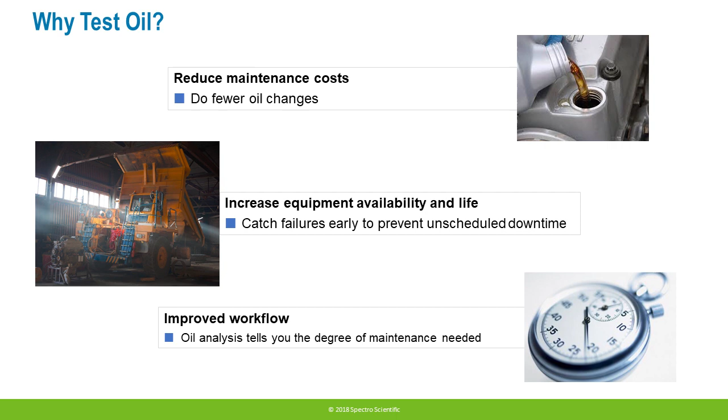So there's a number of fleets that will use off-site laboratories to get this information. There are limitations associated with using off-site labs. The biggest one is the turnaround time. It can take days or weeks to receive the information back, especially for remote locations such as mines.

So the maintenance engineer doesn't have the information needed at the time of the repairs. You're also looking more backwards at oil analysis as a failure analysis as to what happened, instead of using it as predictive maintenance before issues occur.

There's also times when outside laboratories aren't the ones closest to the asset, so there's a limit of understanding of what that asset condition is. If the information is available right at the shop floor, they are able to look closer at that asset at that time. It also limits resampling possibilities.

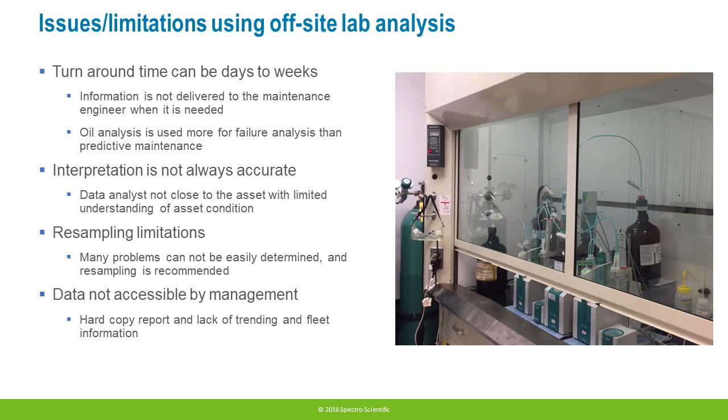If there's issues that need to be looked at closer, being able to send another sample out to an outside lab is an issue. And then, with data not being accessible by management, the hard copy report sent back from the lab doesn't allow a lot of trending and fleet information.

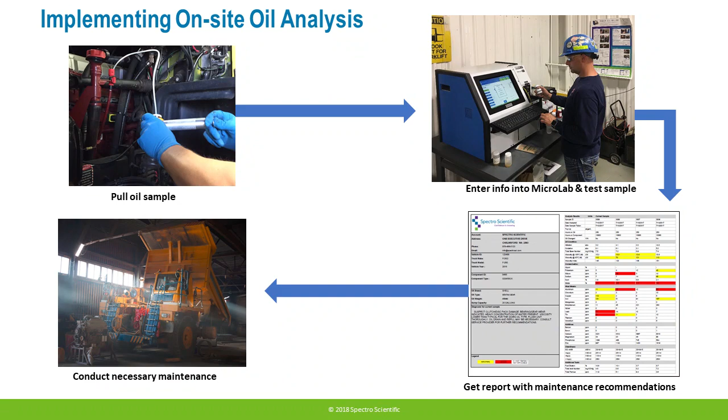So implementing an on-site analysis program is actually quite simple. All you need to do is pull an oil sample, then the operator enters the information into the MicroLab about what oil is being tested. Within 10 minutes, they can get a detailed maintenance recommendation from the MicroLab report and conduct the necessary maintenance actions.

So when you're looking at oil analysis and what you can identify for your equipment, there's 4 top maintenance issues that we find in most fleets: oil properties, where you're looking at whether the oil is overextended or underutilized and can continue to be used. Also, wear metals is a big issue that we see.

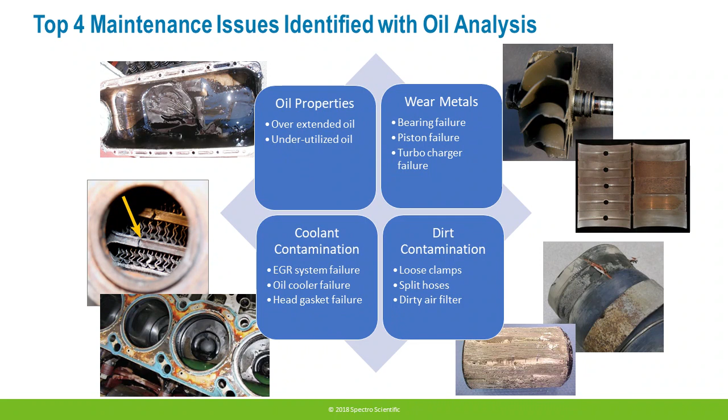The oil analysis can show breakdown from a variety of mechanical areas within the machine. Contamination is also another key factor that we see in oil analysis, either coolant contamination from a variety of sources or dirt contamination.

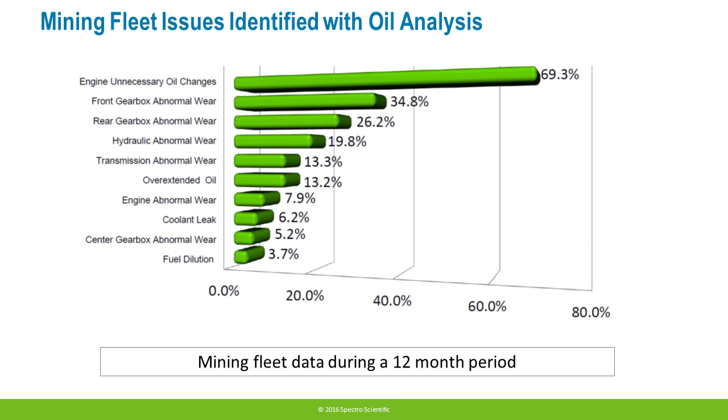Looking at one particular fleet in this mining fleet over the course of a 12-month period, these are just some of the top issues that they identified with oil analysis. You can see a number of wear issues and coolant leaks, but the largest one is unnecessary oil changes. Almost 70% of their samples showed that the oil was actually still good at that time and could continue to be used.

This presents a really large savings opportunity for fleets to be able to extend that oil drain and save the cost of disposal of old oil and the labor charges as well. Looking a little bit at the MicroLab that allows you to do this on-site analysis, it's a cost-effective instrument compared to doing a full on-site oil laboratory. It's very simple, doesn't require a special facility or a laboratory.

It's usually placed somewhere near the workshop floor, and it's all automated, conducting 4 different tests of the oil automatically, then cleans and gets ready for the next sample. So there's no special operators needed, and there's no sample prep needed. It just takes a 5-ounce, 150 ml bottle to connect up to the machine, and then it runs through all of the necessary tests.

The built-in expert system allows the interpretation of all of the data as well. And then there's also, we have online data and asset reporting systems.

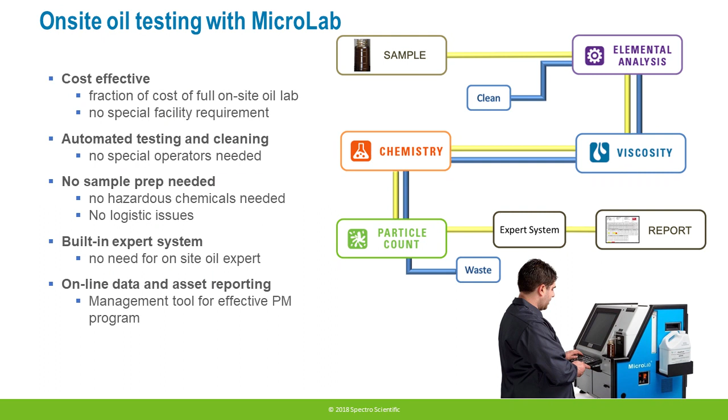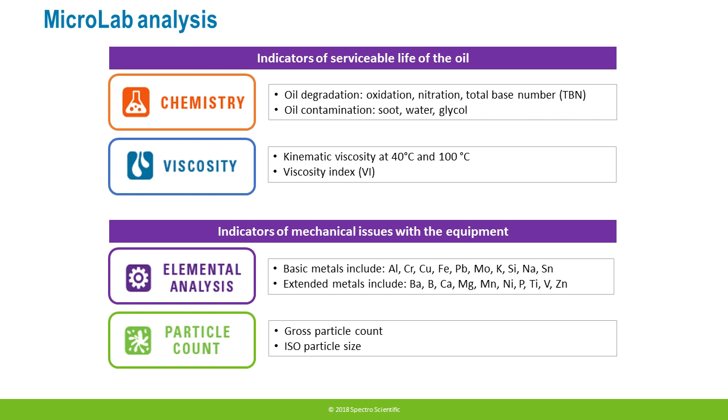The MicroLab analysis gives a complete workup of the oil. You can receive information about the serviceable life of the oil through chemistry parameters such as oxidation, nitration, and total base number. It also gives you oil contamination information and viscosity, and then information about the mechanical issues of the equipment with a full elemental analysis up to 20 elements, showing you any breakdown of the machines and additive conditions of the oil. Particle count gives you information about any particle contamination within the oil.

The MicroLab report is a very simple report to read. It gives you all of the analytical data on the right-hand side, showing up to 4 past samples—the current sample and 3 historic samples—so it allows trending analysis of the machine. Color-coded alarms alert the operator as to any conditions that need to be examined.

And then on the left-hand side, you see the diagnostic statements. This is interpreting all of the data results into mechanic statements that allow the operator to see the diagnosis and maintenance actions that are needed.

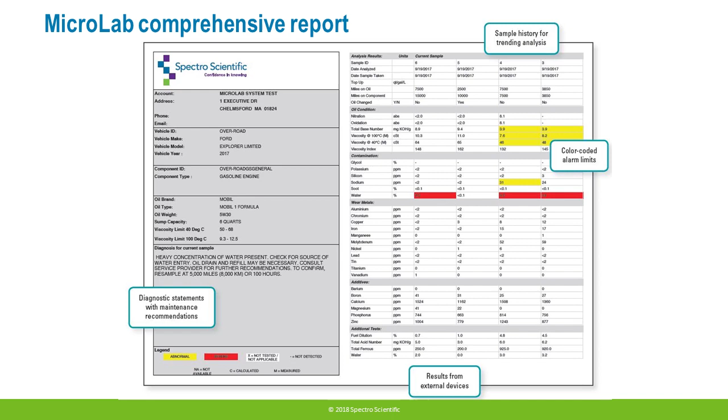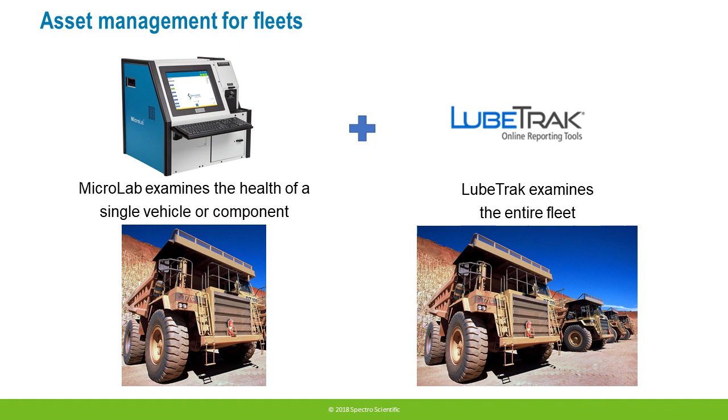In addition to the MicroLab instrument, we have LubeTrak, which is a software data management system. This allows fleets to look across all of the equipment. So the MicroLab gives a report that's telling the maintenance engineer what to do on that particular vehicle or component, and LubeTrak will allow that reliability manager to look across all of the equipment and determine what needs to happen for their maintenance program.

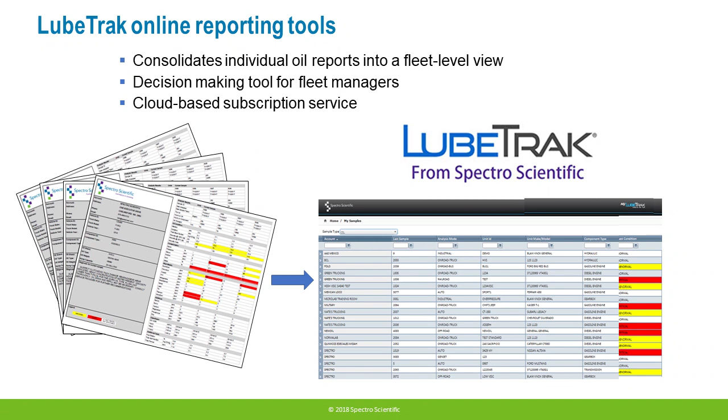Essentially, LubeTrak is consolidating all of the individual reports into a data view, so it allows some fleet decision making. We also have dashboards with various views of graphs and charts of that information. It allows fleets to also have mobile access to any remote locations, so they can view what's going on from headquarters.

LubeTrak is also a customized system. You can set up email alerts and custom reports, which allows you to look closer at your overall maintenance program.

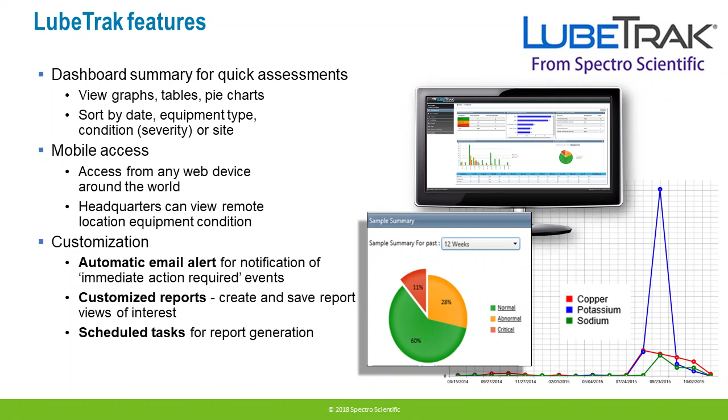Thank you, Janet. I'm going to share some of the information in the case study with you from a client of ours in our region. It's a contract miner based in West Africa, and we did the case study on and off between 2012 and 2015. The project was done as part of a continuous improvement initiative to relieve some of the financial and operational pressures on the business. It was a very old contract, and it was dragging from year to year, so there was a bit of work to be done to make sure that the business makes money.

During the case study, I'll take you through some of the detail, but in summary, we achieved in terms of oil savings, doing oil draining extensions, we saved $166,000. We saved $696,000 by reducing our unexpected failures.

And we saved about $86,000 by improving the hours that we get from the components. We also made a huge improvement to our parts exchange program in terms of value, and I would like to take you through some of the detail in the following slides.

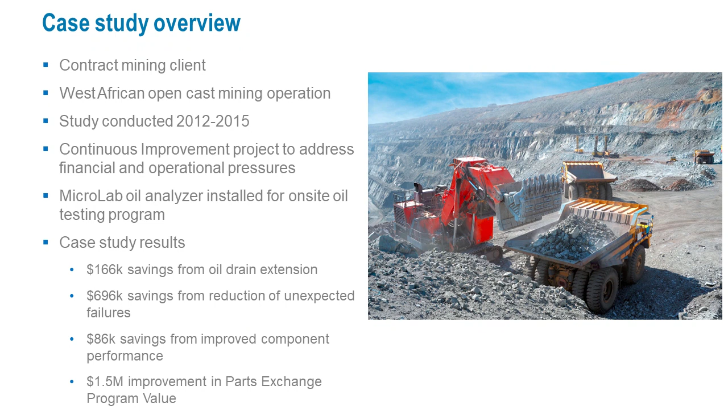So key issues of asset management, I'm guessing this is the same for all the businesses, is basically income and expenses. In this sort of scenario of a contract miner, your key drivers would be your availability of equipment so that the production section can use and utilize the equipment, and other key performance indicators like your mean time between failures and stoppages are your key drivers in this sort of business.

And the same as with any other business, you would always want to reduce your running costs as far as possible. In this specific case, we focused on lubrication costs and component maintenance, which I will explain in the following slides.

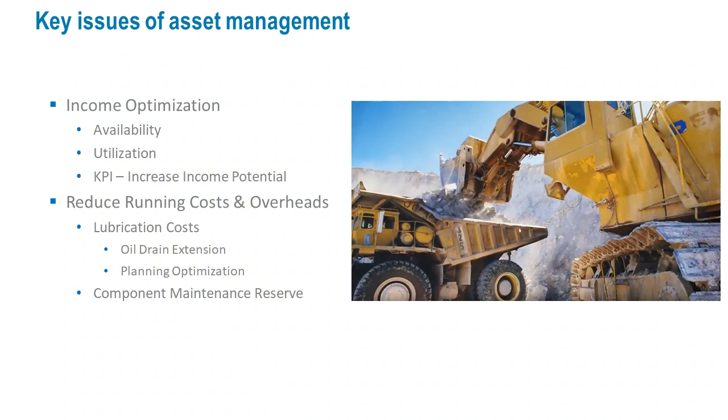So in this particular project, we had targets, obviously, in terms of availability, utilization, and so on, so that we can move a certain amount of product in a day. In this case, effectively, we should utilize a machine 16 hours a day to achieve all of those relevant production targets.

This business was based on a break-even plant model, where your costs basically determine your income, and the costs we derive from historical values and OEM recommendations.

In this case, the plant was running on a dry plant rate, which means that the client supplied all the fuels, and the operators and all of the production staff were paid by the production section in the business. So it was a break-even model for plant or the engineering side.

So all the profit in the business was made on the production side. In terms of maintenance and life cycle, the rates makeup, we focused on spares and lubricants and rotable reserve provisions, which is your maintenance reserve for spares and large components like engines and transmissions, and also for tires and all the other relevant rotables.

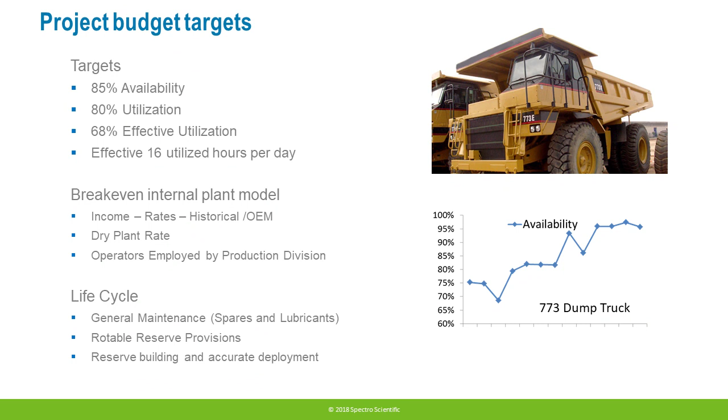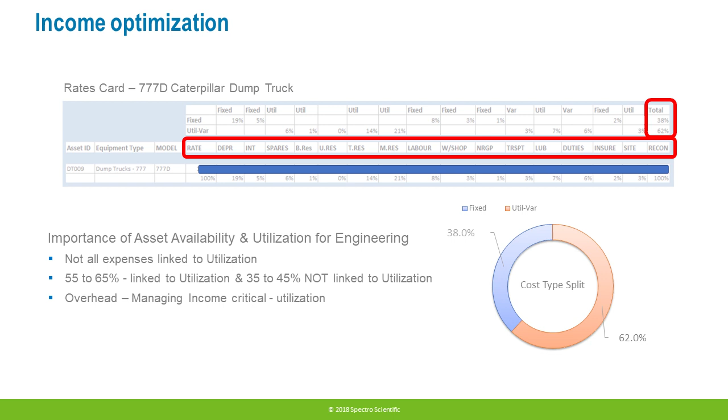And between 35 and 45% of this rate would not be linked to utilization. So it would normally be fixed expenses that you would have. And that's why it's so critical to manage your income and your utilization so that you can cover the fixed portion as well.

On the next slide, I've got an example of availability of machines and how we would monitor that to ensure that you've got availability of equipment so that production can utilize the equipment to generate income.

So highlighted in red in the middle there, I've got the daily and month-to-date availability of loader number 3. So on the month-to-date availability, you can see that the equipment's available for 52% of the month, which is not very good because the target in this case is 90% because it's a prime mover.

So on the right-hand side, we've got a table that indicates the potential gains and losses due to either good availability or poor availability. In this case, loader number 3 has very poor availability, and we're losing $28,000 month to date on that piece of equipment.

I also highlighted the 773 truck fleet on this example. If we have a look on the graph side, also highlighted in red, the month to date availability is 88%, which is above the target of 85%. I will show you now on the next slide what the influence is of this loader on the trucks, because they work as a team, as a production group.

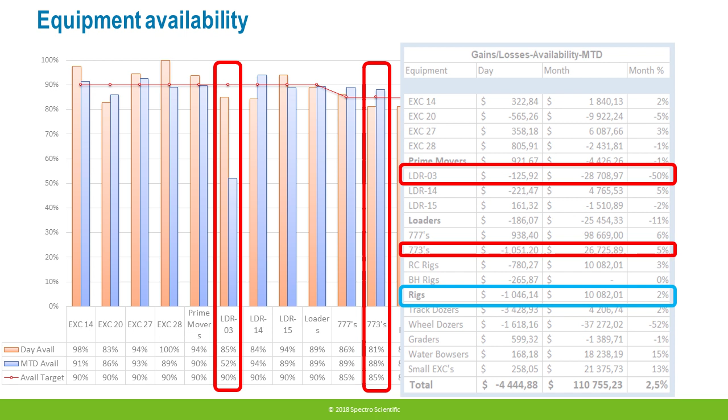Another thing that I've highlighted here, which I'll follow onto the next slide, is the drill rigs, where you can see obviously we're meeting all availability targets in this case, which looks good. But I'll show you now on the next slide on the utilization why we're actually not doing so well, or as well as expected.

As mentioned, this is the equipment utilization graph. Now we've got the utilization month to date versus the availability month to date, with the target.

As mentioned on the previous slide, loader number 3 was not available for production, and we can see the knock-on effect on the 773s I mentioned. The month to date availability is 88%, which is very good, we're hitting targets, but the effective utilization is only 42%.

If you look on the right-hand side, we're actually losing $186,000 month to date on that 773 truck fleet, which is huge. And that's purely our own fault, because the loader is not available to load the trucks.

I'd like to show you the rigs as well. On the previous availability graph, the rigs were above target in terms of availability, but in terms of utilization we're losing $237,000 a month. In this specific case, it was due to the client not having a place for us to drill, so the drills were standing.

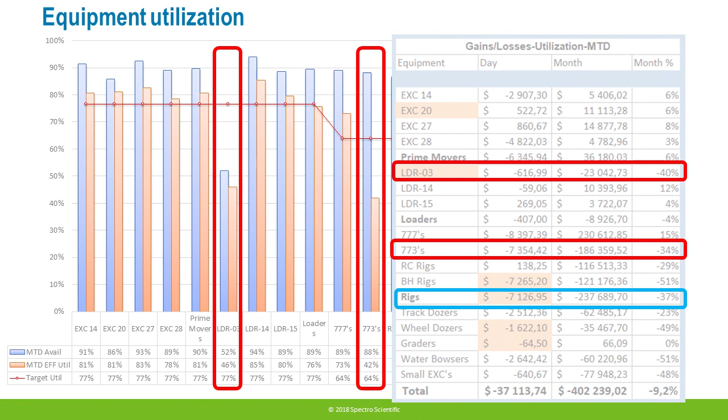This is obviously quite critical. If you think back to the rates I showed previously, where you have a huge fixed portion that you need to cover, and the drills are not working, that's a serious problem.

On this slide, I'd like to show you what the on-site lab mentored us on and helped us with when we installed it. We did a bit of homework, and it took some time to find our feet, but on our prime movers, excavators, and main fleets, we saw a major improvement in mean time between failure.

This KPI is really more about rhythm than anything else, and it really helped the rhythm of production, which helped a lot. This, in turn, translated to better availability as well. I'll show you in one of the slides to come how we got these results.

So with better availability, from what we can see here, it's let's call it a 5 to 10% step up since we installed the lab at that time. But that 5 to 10% is worth millions of dollars, hundreds of thousands of dollars in production time.

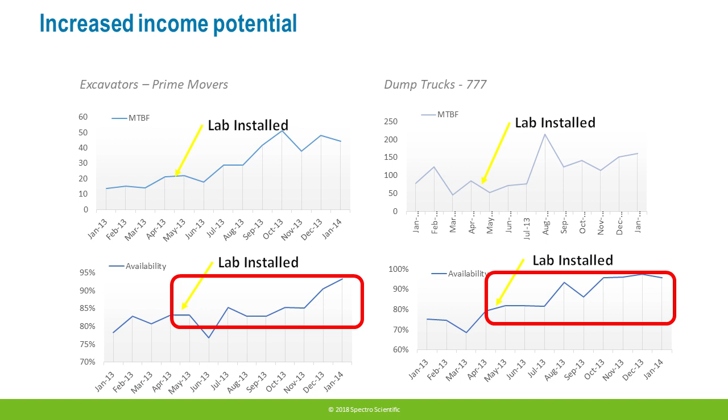On the next slide, we've got the piece of the rates card of a piece of equipment that maintenance actually has control over. We basically have control over the spares expenditure, the bins, the tires, the maintenance reserve, the labor, the workshop overheads, or some of it, and the lubrication costs.

In this case study, I'm going to go into the maintenance reserve portion, which is the big engines, transmissions, final drives, and so on, which is included in the life cycle costing. Then I also want to focus on the lubrication costs and how we got that down.

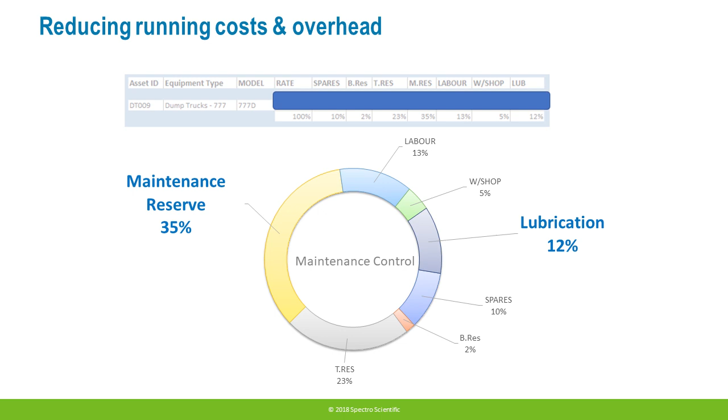In terms of lubrication costs, as we can see on the graph, lubrication makes up about 12% of the portion of the rates card that we as a maintenance department have control over. We did an oil drain extension program to save on lubrication costs, but also to optimize the way we plan and work on the equipment.

On this particular site, we focused on hydraulic, transmission, and gear oils as a start. We calculated the theoretical oil consumption baseline, then the actual baseline based on a 6-month history, and based on the oil analysis data we had, we did some analysis and stats to understand a safe drain interval for some components, and which ones we could extend until the oil analysis told us to change the oils.

Part of the strategy was also to sharpen up the way we manage and control the issuing of oil on a daily basis. We implemented a pre-PM sampling practice, where we would stop and sample the machine before the PM service instead of during the PM service.

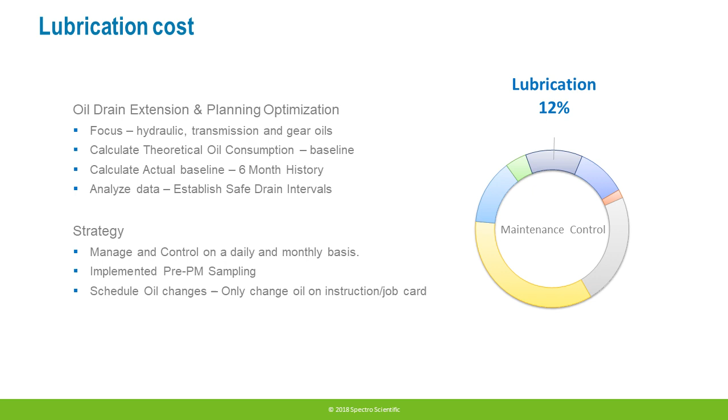We also set up in our maintenance system, which we use to plan services, all of the oil compartments as components, so that we can track the exact time on oil changes or between oil changes.

So to calculate the theoretical oil consumption, there's obviously different methods of doing that, which you can find all over the internet, but we took a more practical approach. We looked at all of the different sump capacities and intervals that they needed to be changed, and added them together over a 2,000-hour period, which is a normal service cycle on these big machines.

In this case, we looked at the 777D dump trucks, and we added a 15% factor for the top-ups, leaks, and others. And we got to a theoretical oil consumption, which we can see on the screen. For hydraulic oil, we got 0.7 liters an hour, and for the transmission and gear oils, we got 0.93 liters per hour that we were supposed to use theoretically.

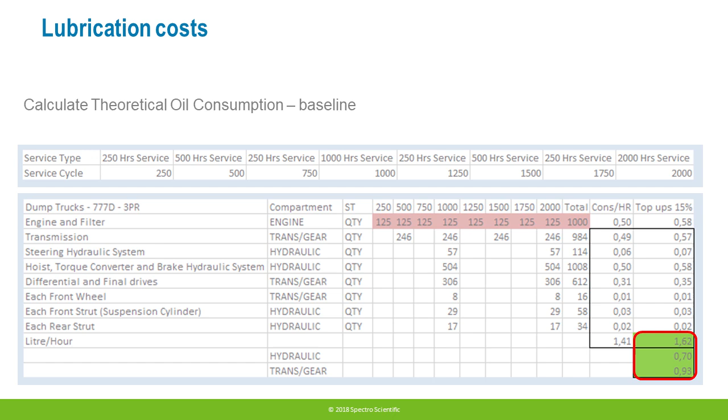Then we went through the history of the oil that we have issued over the 6 months leading up to the start of the project, so we could see that reality paints a bit of a different picture. We were actually overusing on hydraulic oils, and we were looking quite good on the transmission and gear oils. And there's obviously always room for improvement.

So that is what we tried to do, but that was our baseline. Our baseline was 2.5 liters per machine hour, which is what we also used as a baseline going forward.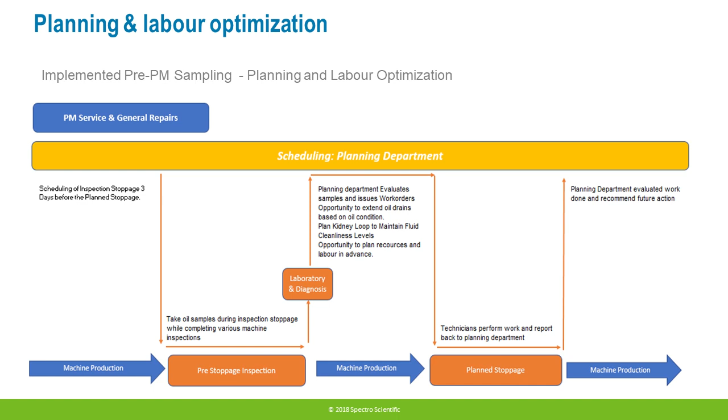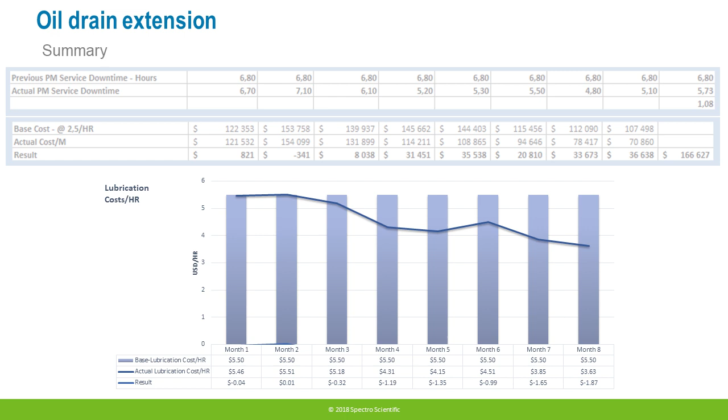On the lubrication cost, there's a line on the graph over the 9 months showing per machine hour how we brought the cost down. We ended up saving $1.80 plus per machine hour on this fleet.

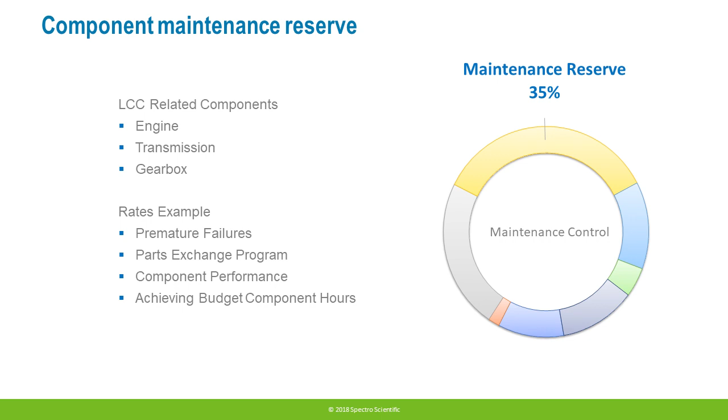Okay, moving over to the component maintenance reserve section I want to share with you guys. You can see that maintenance reserve makes up around 35% of the expenditure that maintenance actually controls. The maintenance reserve is basically an account where we capture expenditure linked to the big components - engines, transmissions, gearboxes. In this component maintenance reserve, we focused on premature failures, getting more out of our parts exchange program, and improving our component performance.

On the maintenance reserve or component reserve, I'd like to show you an example of how you get to the maintenance reserve portion on a rates card, and how important condition monitoring and oil analysis actually is when it comes to maintenance reserve items.

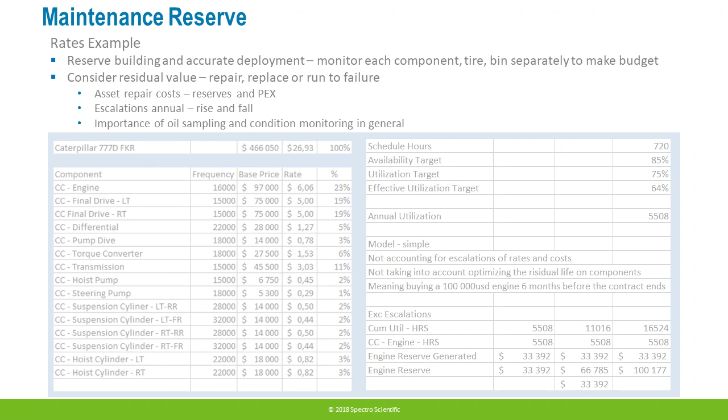All the components and rotables on the mining contractor site get managed exactly the same way. So if you're down $33,000 on one component, it's very difficult to catch up on that cost, or you need to recover it from some other component that you extend past its budgeted lifespan in order to cover for this particular engine. And that's just to create a bit of background on the subject.

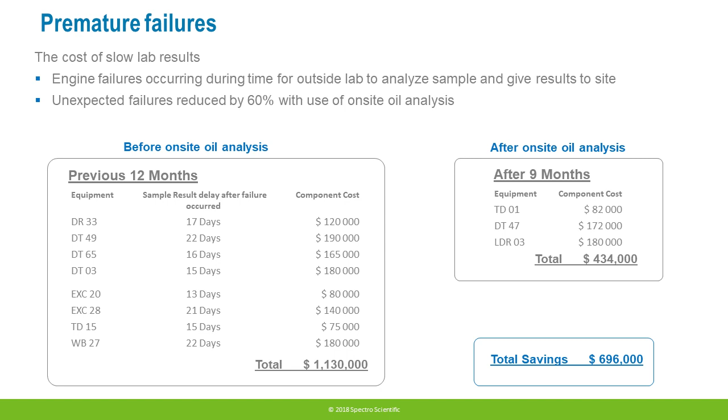After we implemented the on-site oil analysis program and could keep an eye on what's happening, we only lost 3 engines, which is not brilliant, but it's a huge improvement. That equated to a total saving of $696,000, which is quite large in this sort of operation.

In terms of our parts exchange program, we had to improve our balances. How a parts exchange program normally works for a contract miner is he would purchase a component like an engine from the OEM, and part of that purchase would include a core value. So if you purchased an engine in a parts exchange program, half of that cost would normally be just a core value. So in essence, you'd basically pay half of the value of that engine - you'd be paying for the repair of that engine.

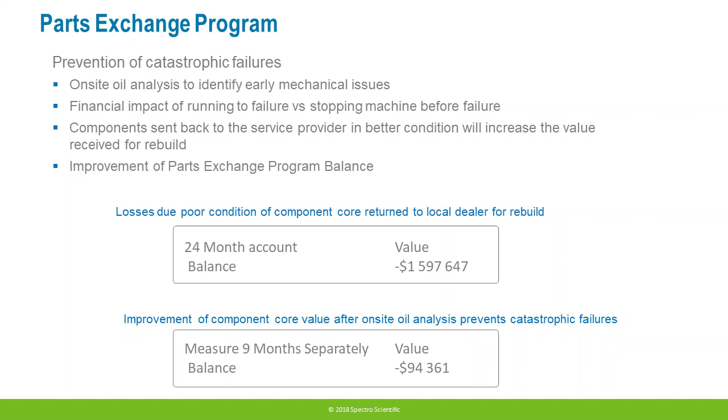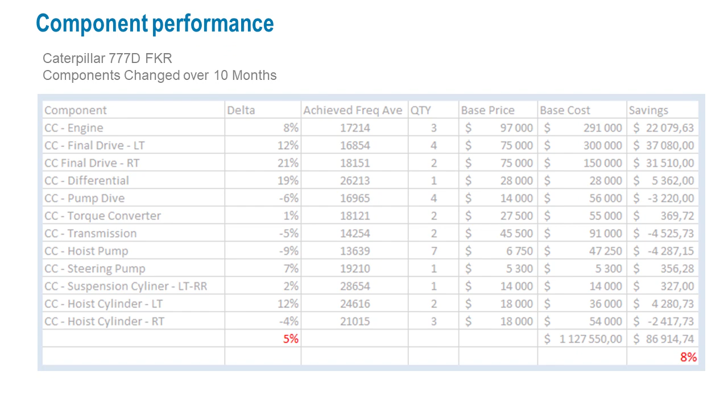Turning the actual hours into actual dollars, based on the pricing at that stage, you could see that we actually gained 8% just on that fleet. If you had to apply the same method or strategy across your whole fleet, and did that from day one, the savings would have been huge.

In summary, in my opinion, if you adopt the strategy of on-site oil analysis and integrate the technology into your daily operations, you will definitely see the benefits in your business. As seen from the data in the webinar, you will definitely see improved asset availability and utilization.

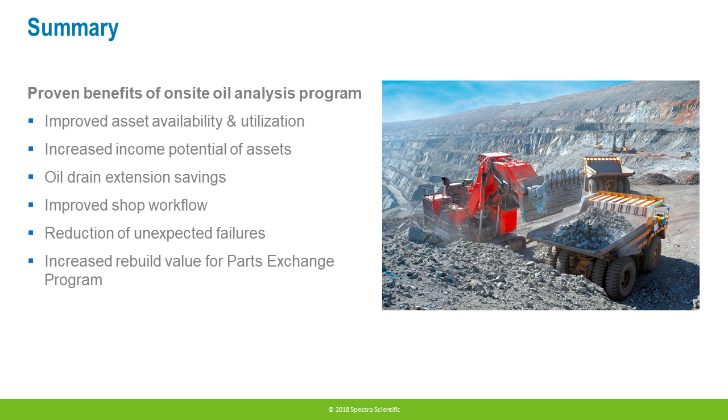You will have an increase of income potential for your assets. You'll be able to run an effective oil drain extension program, which is very difficult to do when using an off-site lab, purely because of the time delays. You'll be able to streamline workflow in your workshops. You will reduce your unexpected failures by having all these results on hand, and you'll have a very good chance to increase the value of your parts exchange program.